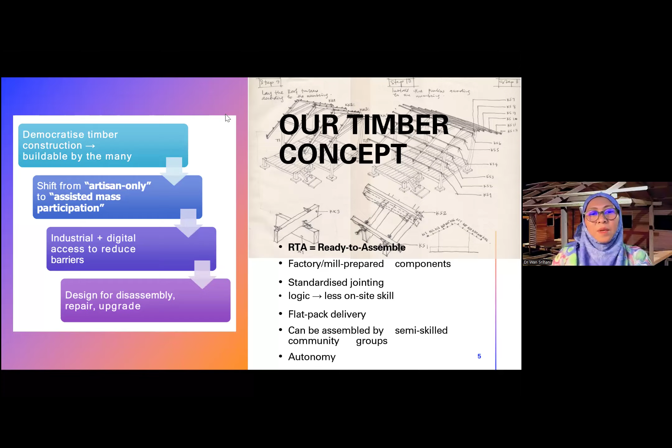Okay, next. So we told them we are looking at it as a whole solution - sustainable forestry, the wood processing industry, all aspects encompassed within the timber industry supply chain. What we harvest from the forest, we bring to the nearest processing area, manufacture nearby, and produce our own brand.

At that moment we were working with the state government of Pahang to give them a brand, a timber house as a brand. But as usual there are so many red tapes and barriers to reach there - the bureaucracy, especially when it comes to timber, is a lot.

So we were discussing all these ideas, and that led further into a discussion where the Japanese delegates said they were looking into something similar, but from their side it's much more advanced. They were calculating LCA - life cycle analysis - which adds more value to the product they are selling.

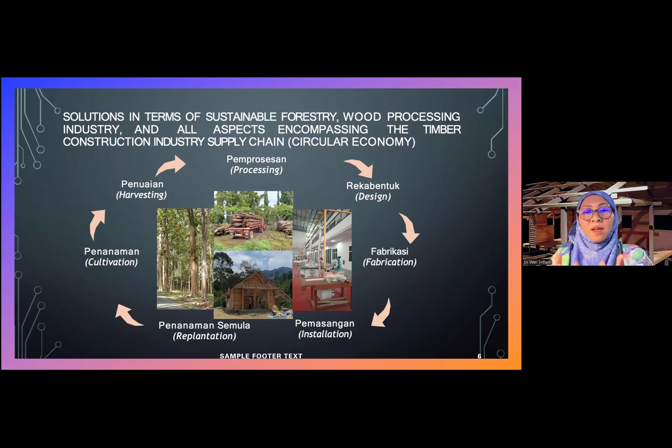So after this slide, I will pass to Dr. Nurin, because this is where what happened during the visit in Japan comes in. Dr. Nurin, you have the screen now.

Okay, can you guys hear me? Yes, okay. At first we expected to learn mainly about timber buildings. However, the most important lesson was not found in one building - it was found in the connections: connections of research institutions, forests, factories, engineers, designers, craftsmen, and also markets.

Japan's timber industry does not operate in isolated silos, because forest management supports sustainable harvesting, timber certifications support confidence and traceability, research institutions test the materials and structural systems, and architects translate these capabilities into buildings. Each stage supports the next, which informs the manufacturing.

Another question is how this integration is part of Japan's most important competitive advantage. We observed that Japan's strength is not simply that it possesses advanced machines, good forests, or talented architects - the strength lies in the fact that these elements are connected into a coherent ecosystem. This leads us to an important reflection: Malaysia may not lack knowledge or resources. What we may lack is a stronger integration between the knowledge and resources we already possess. Okay, next one.

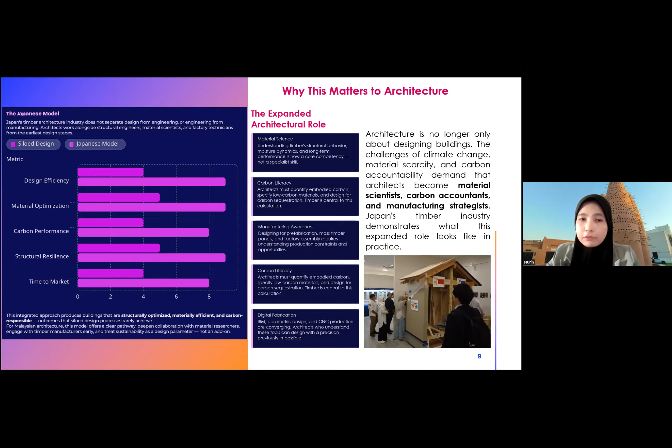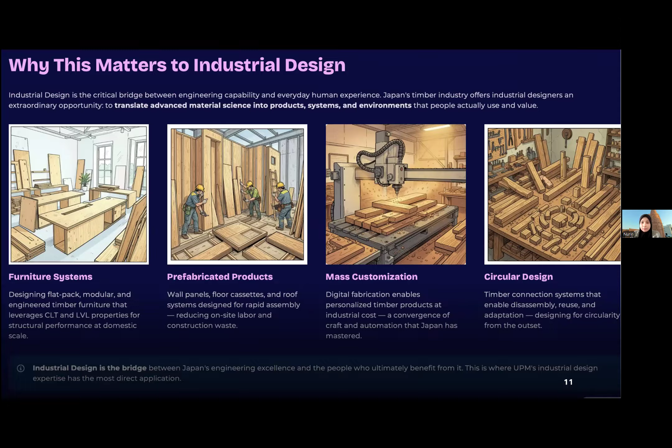From another point of view, why does this matter to industrial design? We can see that industrial design is another essential part of this ecosystem, because not every innovation needs to become a major building.

Innovation may also occur through furniture, modular components, construction joints, and prefabricated products and digitally fabricated systems. Industrial designers will help to transform the raw material into products that can be manufactured consistently, transported efficiently, assembled easily, and repaired when necessary. This is where digital fabrication also creates opportunities for mass customization.

Circular design is particularly relevant rather than designing products that are permanently bonded and discarded when one component fails, where designers can help develop systems with reversible joints and replaceable parts. This is where a research idea can become a prototype, and the prototype can become a tested product, eventually entering the wider industry and community use.

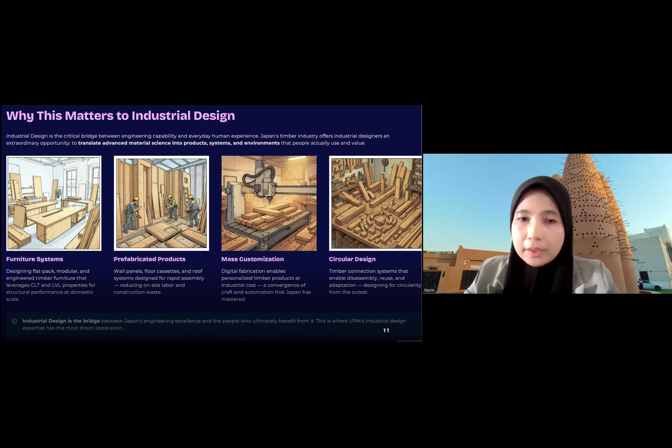Okay, Japan's secret is the entire value chain. If we had to summarize Japan's timber innovation in one sentence, it would be this: Japan's secret is not a single product, it is the strength of the entire value chain.

The process begins with forest management, and continues with responsible harvesting. Then research institutions test the material and its potential applications. Engineers transform the research into structural systems where factories manufacture the components under controlled conditions. Then product developers transform these components into tested and certified systems. Finally, architects and contractors apply them in the real world.

But this is not simply a straight line from the forest to the buildings, it is a feedback loop. The performance of the completed buildings will inform future research, and manufacturing limitations influence the architectural design. When one part of the system improves, the entire value chain becomes stronger.

This is what Malaysia should study carefully, where the objective is not merely to produce one impressive timber building, but to establish a system that will allow many high quality timber buildings and products to be developed consistently. So we look at what Malaysia already has.

At this point, it is better for us to ask where does Malaysia stand, where it is easy to assume that Malaysia must begin from the beginning. But the thing is, Malaysia already possesses many of the essential ingredients.

We have significant forest resources, and we also have established sustainable forest management practices. We have access to diverse tropical timber species with valuable structural properties. We also have the Malaysian Timber Certification Scheme, which provides an important foundation for responsible sourcing, and openness for international recognition and market confidence.

On top of that, we also have strong universities and research institutions. At UPM and other Malaysian institutions, expertise already exists in forestry, architecture, engineering, and material science. So therefore, the main problem is not necessarily the absence of knowledge, it is the fragmentation of the knowledge.

Research may remain within a university without reaching industry. So the question to ponder is, instead of asking does Malaysia have the capacity, the more useful question is how can we connect our existing capacity more effectively? We need stronger coordination, translation, and collaboration.

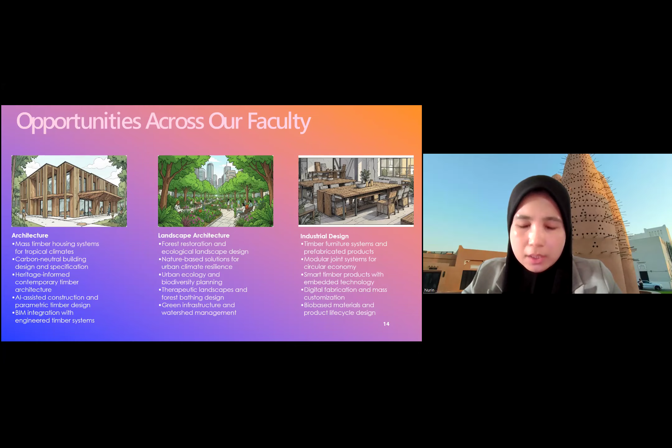Consider, for example, a mass timber housing project. The architect designs the spatial and structural system, the industrial designer develops the modular components and joints, and the landscape architect addresses the water ecology, planting, and microclimate. This is what interdisciplinary design should mean, it is not simply placing several disciplines beside one another, but allowing each discipline to influence the problem from the beginning.

We also have an opportunity to visit Port Plus Obayashi Yokohama Training Center in Yokohama. This is actually a training center. It is natural to focus on the completed architecture where we see its height, its structure, its facade, and also its expressive timber expressions.

But this building is only the visible outcome. Behind is actually decades of less visible work like forest management, material research, structural testing, factory investment, and skilled craftsmanship. This is why Japan has demonstrated that timber is not merely a traditional material. Another significant statement we can learn here is that timber is a future material.

In other words, Malaysia should not simply copy these Japanese buildings or technologies. Malaysia can learn from the Japanese system, which developed in response to Japanese forest species, industries, regulations, labor conditions, climate, and seismic risk. Malaysia, on the other hand, faces different conditions because we have to respond to our tropical humidity, heavy rainfall, termites, local construction skills, and our lifestyles.

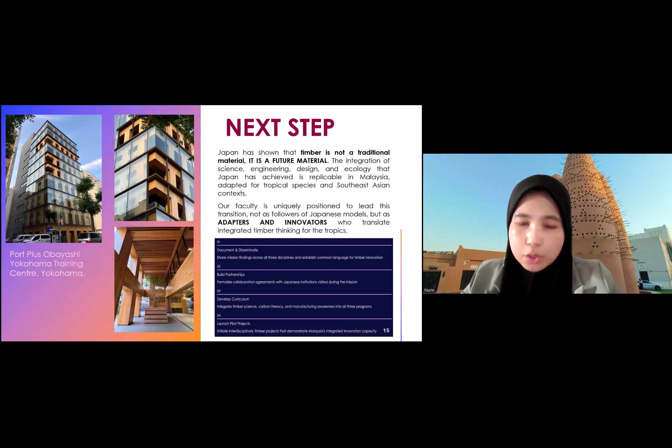So our role is therefore not to become followers of this model, but to become adapters and innovators. The next step is not imitation. The next step is translation - to translate the integrated timber thinking into solutions appropriate for the tropics.

So I think maybe Dr. Wan can explain this part for the international opportunities.

Yeah, this was given to me, approached to me by Prof. Hisham of engineering. For everybody's benefit to understand his background, he did his bachelor, master, and PhD in Japan. Hence, he is very much well versed in the language as well as the writing.

His PhD thesis is actually in Japanese writing. So he always has, every year, a group of students from Shinshu University coming in as exchange students, mobility students. One of the students earlier this year was an architecture student, and this girl, Nana, was given to me.

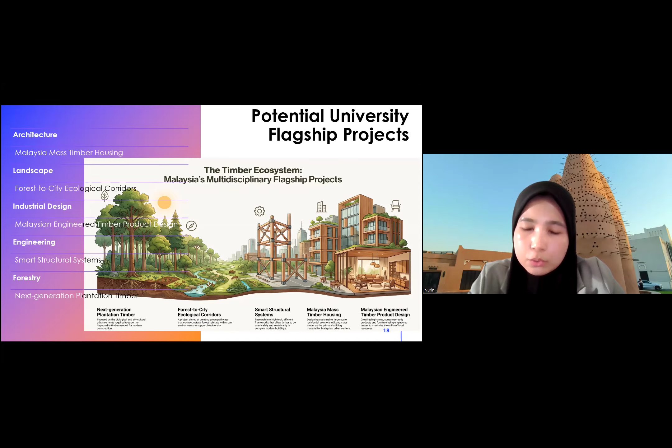These projects should not operate independently. Maybe they can form a larger initiative, a Malaysian timber ecosystem led by UPM. Such an ecosystem could connect design, engineering, forestry, industry, certification, and community participation. It could also position UPM as a regional center for tropical timber innovation, not by repeating models developed elsewhere, but by producing knowledge that other tropical countries may eventually learn from.

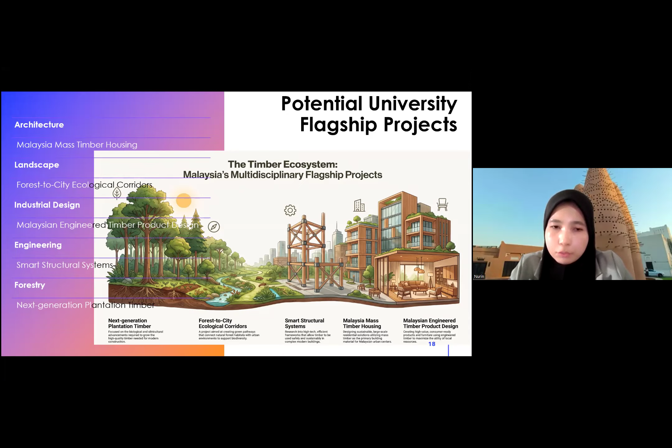At the beginning, we always asked what we see when we look at a timber building. After this journey, perhaps we can now see much more. We see the forest that must be managed responsibly. We see the researcher who tests the materials. We see the engineers who validate its performance. We see the factories that transform precision into possibility. We see the architects and designers who connect technology with human needs. Finally, we see the communities who ultimately give meaning to the buildings.

This ecosystem is created across multiple collaborations, and our responsibility is to connect these strengths and adapt the knowledge to tropical conditions. So the future of architecture therefore extends far beyond its buildings.